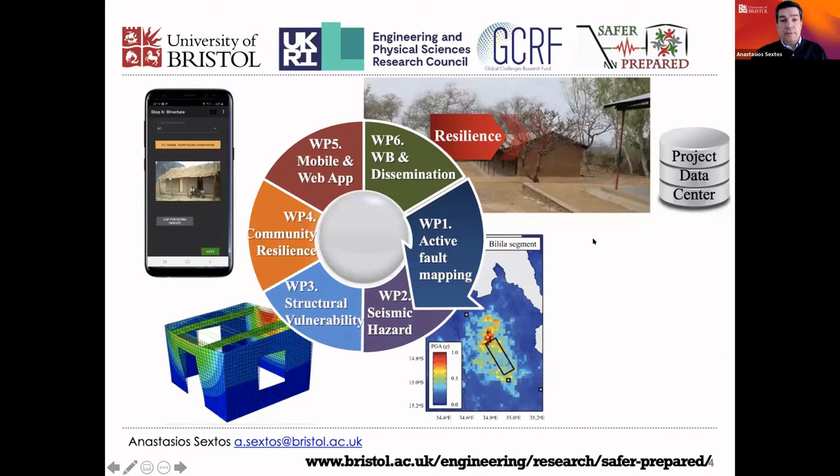This practically means that at the end of the day, we aim to digest all the information and research we are doing along with our Malawi partners and create tools that are rigorous inside and quite complicated, but very simple to use with an easy interface. We deploy them fast to collect the first data, contextualize for the country of Malawi, train people by webinars and also by physical presence, and co-design the strategy for national implementation.

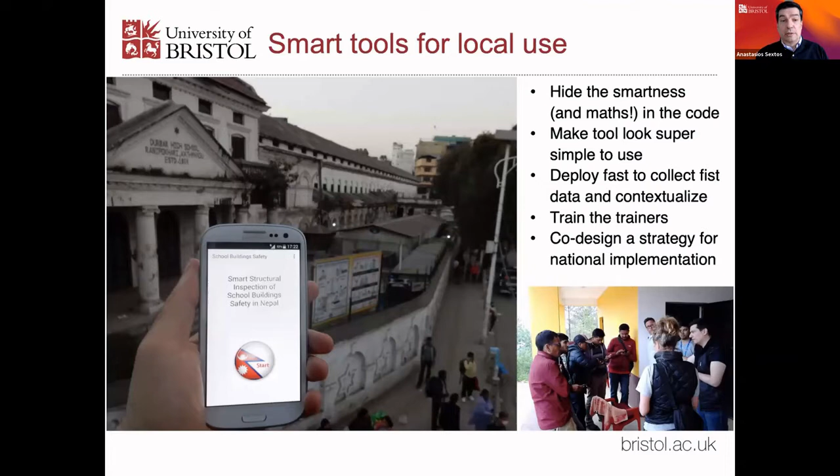Doing community engagement, unfortunately due to COVID, we weren't able to do that extensively yet in Malawi, but we hope that during the summer things will improve and we will share more information with you, and then actually transfer the ownership for everything we do to the people and the country of Malawi, so that you can use them with us and without us in the future.

You will hear more about that in the next presentations. In the meantime, feel free to visit our Safer Prepared website, where we will also be uploading the outcomes of this interesting webinar.

I'm from the School of Earth Sciences, and I'm going to talk about earthquakes in Malawi and East Africa in general. Many people are slightly surprised that we're working on earthquakes in Africa, because the perception is that the risk associated with earthquakes is low in Africa. And that's not entirely true.

Seismic risk is actually made of three components: the hazard, the exposure, and the vulnerability. In Africa, the hazard comes from the East African Rift, which is on a plate boundary that extends from Ethiopia in the north through to Mozambique in the south and runs through Malawi. The spreading rate is quite slow, so the earthquakes are infrequent, but you can clearly see a band of earthquakes running through the continent.

The exposure in Africa is very high. There's a high population density, and as you can see from this map in the center here, a lot of that's actually associated with the Rift Valley. Perhaps most importantly, vulnerability is extremely high, largely because the quality of the buildings means they're very vulnerable to seismic events. When combined, these factors lead to a high seismic risk.

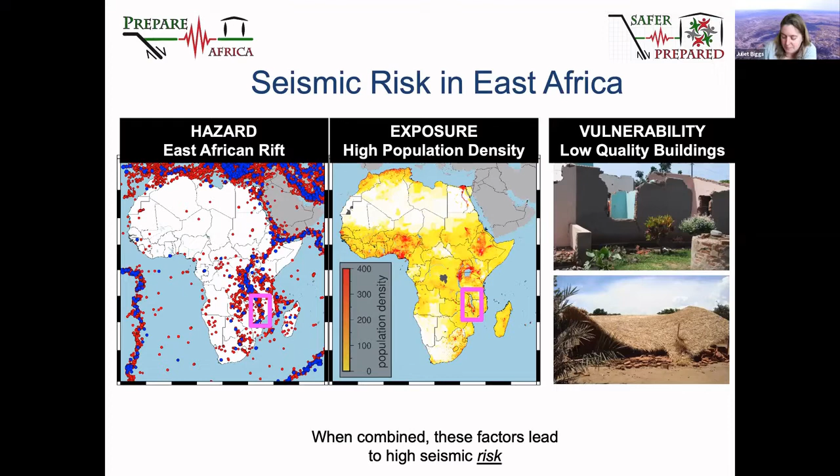I've mentioned that there are earthquakes all through the East African Rift, but if we zoom in on Malawi, you'll see that the red lines, which represent the faults, run all the way through the middle of Lake Malawi, and then through the densely populated area of southern Malawi, past the cities of Zomba and Blantyre. This is an active continental rift zone.

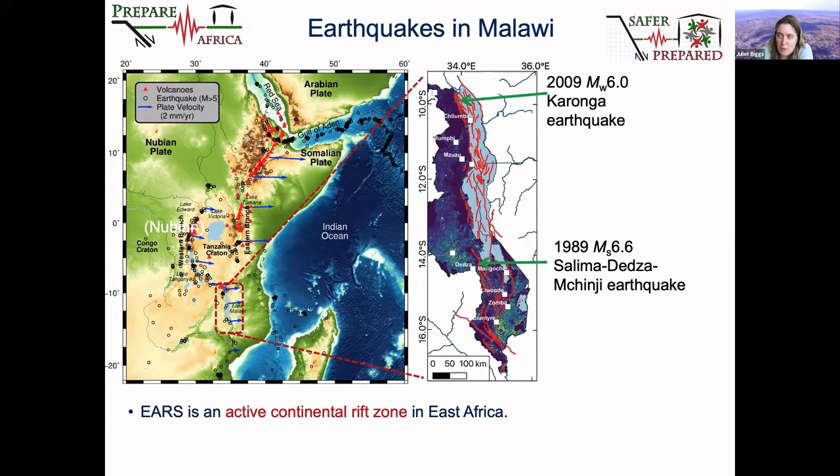In recent years, there have been two notable earthquakes. Firstly, the 1989 Salima Dedza earthquake, which was a magnitude 6.6 earthquake and was actually quite deep. And more recently, the 2009 Karonga earthquake, which was a magnitude 6 earthquake that happened in the north of the country. This earthquake was actually a fairly small magnitude.

There was a sequence of earthquakes, the largest of which was this magnitude 6, and it occurred in a very rural area of northern Malawi. But even so, it actually caused a lot of damage. It caused the collapse of over 1,500 buildings and major damage to several thousand more.

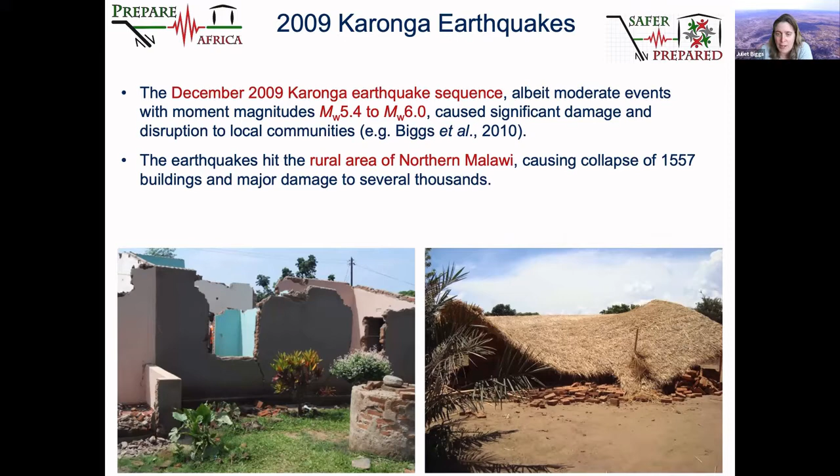But actually, this is one of the smaller earthquakes that might happen in Malawi. What we know is that these earthquakes occur fairly infrequently, but the instrumental record in Malawi is much shorter than many other countries around the world. Many countries have records extending back many thousands of years. In Malawi, the record of earthquakes really only extends back as far as 1950. So our knowledge of what happened in the past is very limited.

In order to overcome that, we have to look at the landscape and see where the earthquakes are recorded. Earthquakes occur on faults, and when an earthquake happens, the ground moves and it leaves what we call a scarp in the surface.

We've been working very closely with the Geological Survey, and in particular with Hassan Mdala, and there's a picture of him here, on the fault scarp that runs close to the city of Zomba. It's called the Zomba Fault. This scarp is about 30 meters high, and it extends for 50 kilometers.

We can estimate the size of the earthquake that would have caused this fault scarp. If we look at the global compilation, plotted on the right here, we can see that a fault length of about 50 kilometers corresponds to an earthquake of about magnitude 7.1. So in order to form this fault scarp, we know there must have been an earthquake of about magnitude 7 sometime in the last few thousand years, but we can't give a precise date.

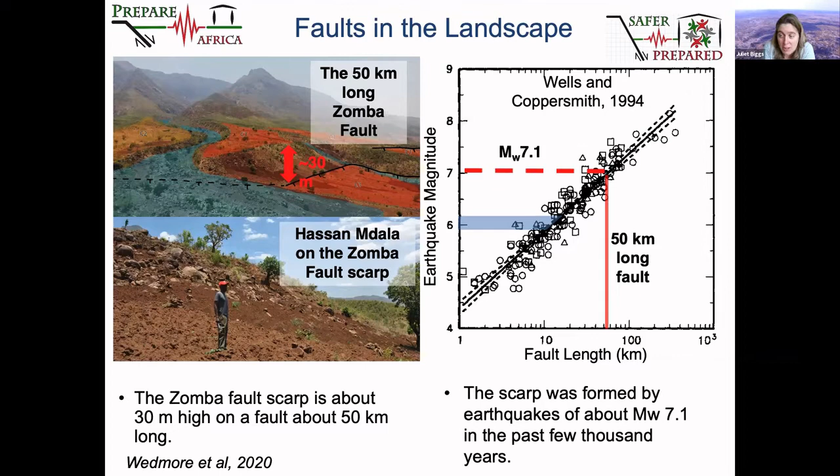What we found is the faults extend all throughout the country, and they have the potential for earthquakes ranging between magnitude 6.5 and right the way up to magnitude 8. That's significantly larger than any of the earthquakes recorded in the last century. However, these earthquakes are likely to be quite rare.

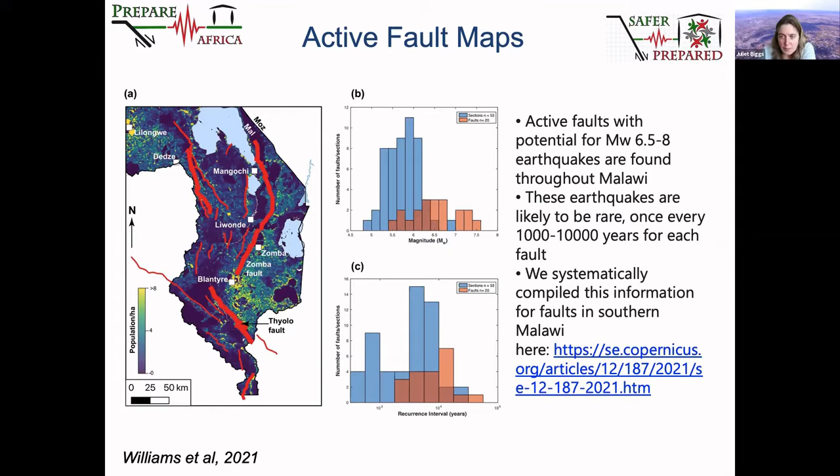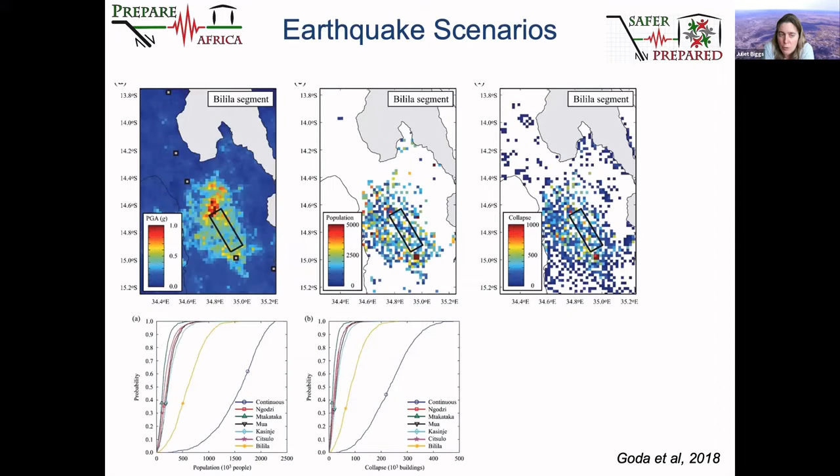This information allows us to imagine what might happen in individual earthquakes. Here's an example: an earthquake on the Bilila segment of a fault called the Bilila-Mtakataka fault. The earthquake would be about magnitude 6.7, so not a particularly large earthquake by Malawi standards. But even so, it's in a much more densely populated region than the Karonga earthquake.

We estimate an earthquake here would affect about 500,000 people and cause the collapse of about 70,000 buildings. And remember, this is still a fairly moderate size earthquake for Malawi. But this is just one scenario.

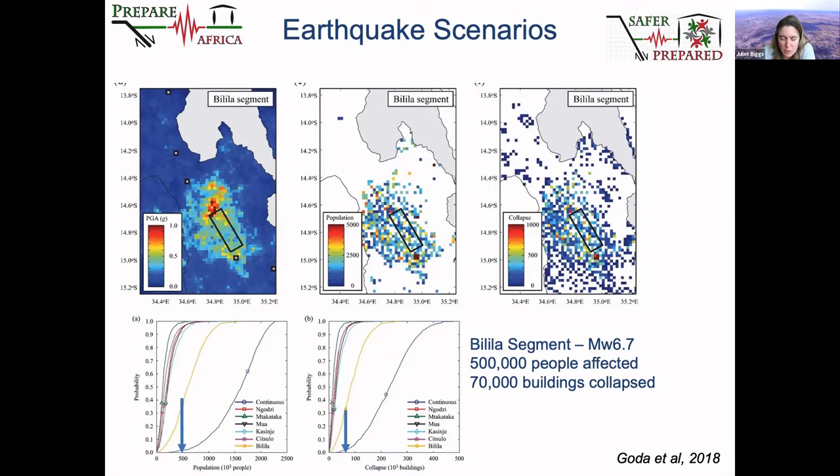As I said, there are faults running all through the country, so we need to think about what's going to happen overall. To do that, we come up with something called a probabilistic hazard map, which looks at the overall shaking level that you might expect in any part of the country.

I've shown two examples of these maps here. The one on the left comes from an international project called the Global Earthquake Model, and that shows the sort of shaking you might expect if you just looked at the instrumental record of earthquakes actually recorded in the short record in Malawi. The picture on the right is what we get when we include the information from those fault scarps. As you can see, the estimates of shaking are significantly higher.

These sorts of maps can be used for risk assessment and also for developing building codes. We're currently working on these so that we can include them in the new Safer Prepared app that's being developed, which focuses specifically on school building safety. You're going to hear more about that from the next presenter.

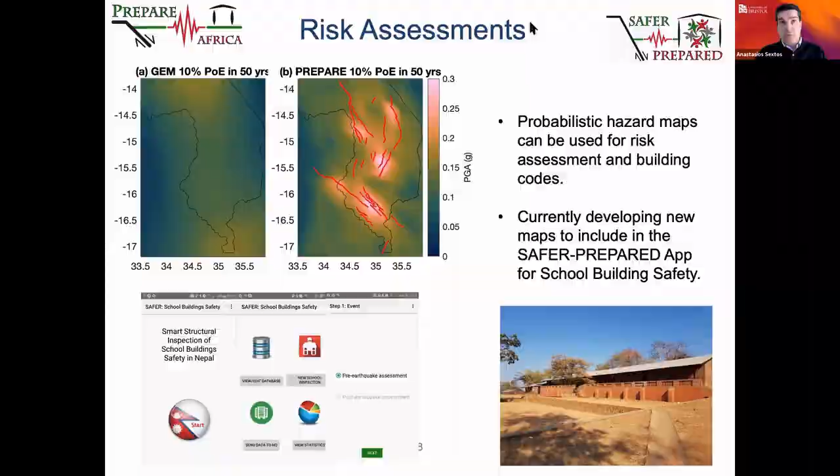It is equally important to discuss how we can assess probabilistically the performance of structures and school buildings during an earthquake. I would like to pass the floor to Professor McDonald and Dr. De Risi to talk to us about this very important topic.

Yes, perfect. Hello everyone. Today I am Dr. Raffaele De Risi, lecturer in civil engineering at University of Bristol. I am going to present the work that we have done together with Professor John McDonald and Dr. Nicola Giordano, who is the main postdoctoral research associate on the project.

Basically, we needed to create models that can be fed into the app. As Juliet was mentioning, risk is the product of exposure, vulnerability, and hazard. We focused on vulnerability. So what is the best model that we can develop for the vulnerability assessment? It is certainly a simple function that represents somehow a group of buildings, a group of structural elements.

Now, the journey to do so is quite long, it's not easy. First you have to be able to identify the structural typologies, and therefore you have to make yourself an idea of what is the portfolio of structures. Then you have to identify the material properties, and eventually do some analysis. Only at the end can you basically fit some functional models that can be fed into the app.

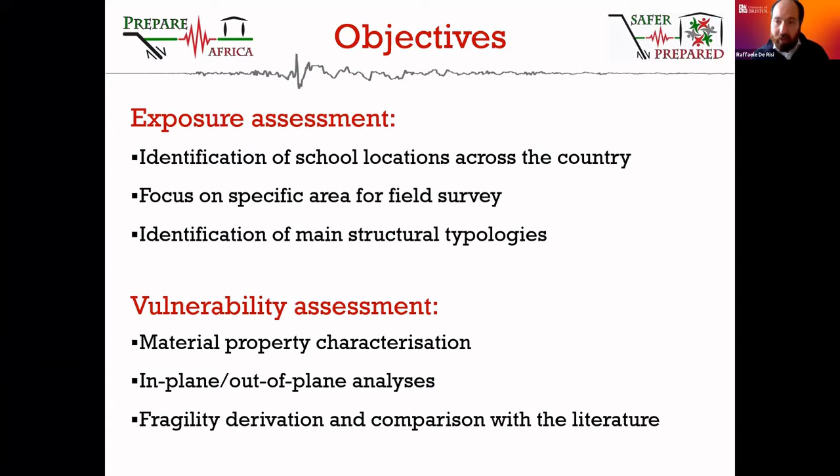So the journey started with very global, large-scale analysis, where we started from the census 2018, just to understand the level of scolarization. Then we have the precise map and location of primary schools and secondary schools.

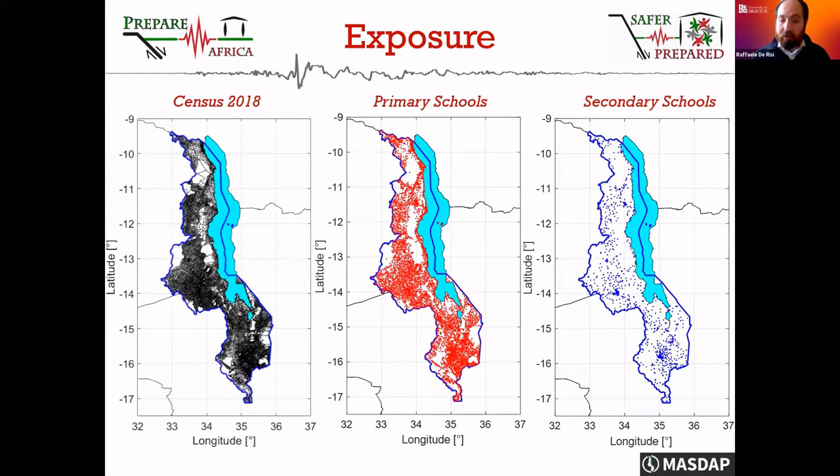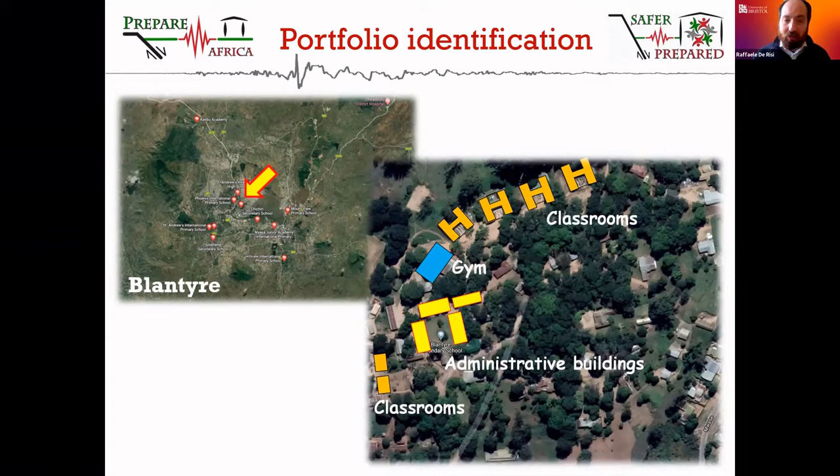After that, we started to do a small exercise, zooming in on Google Earth, because we were not able to go and have a proper survey. We started to discuss a little bit about what is the geometrical configuration of classrooms, administrative buildings, and so on. Eventually, you can come up with a sort of geometrical portfolio identification of the structures that belong to a specific typology.

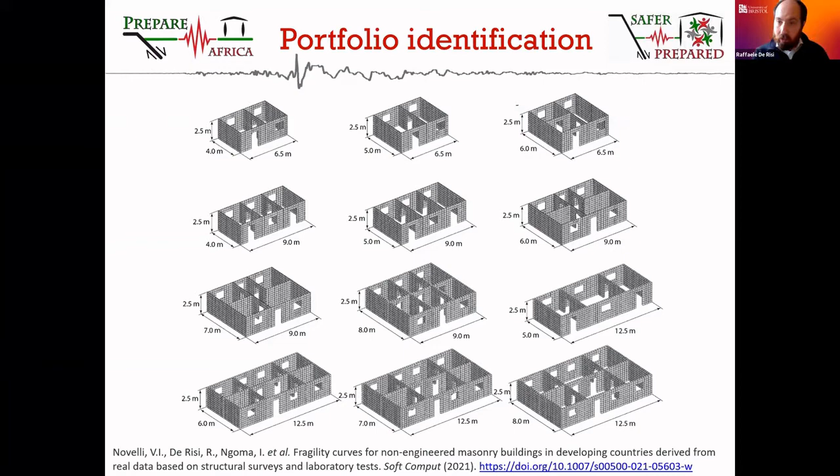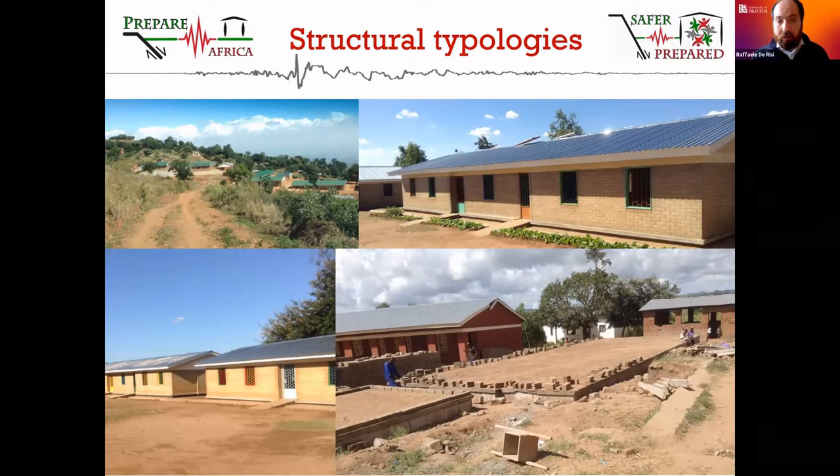But we also kept an eye on the new structural typologies that the government is building, and that NGOs are building across the country. And we came up with a structural identification that somehow is consistent with what we already knew about residential buildings, and in fact is consistent with the Kloukinas et al. paper available on the Journal of Housing and the Built Environment.

The classification of buildings is realized according to PAGER, which is a prompt assessment of the global earthquake for response. And then we also have the European classification, which is the European macroseismic scale.

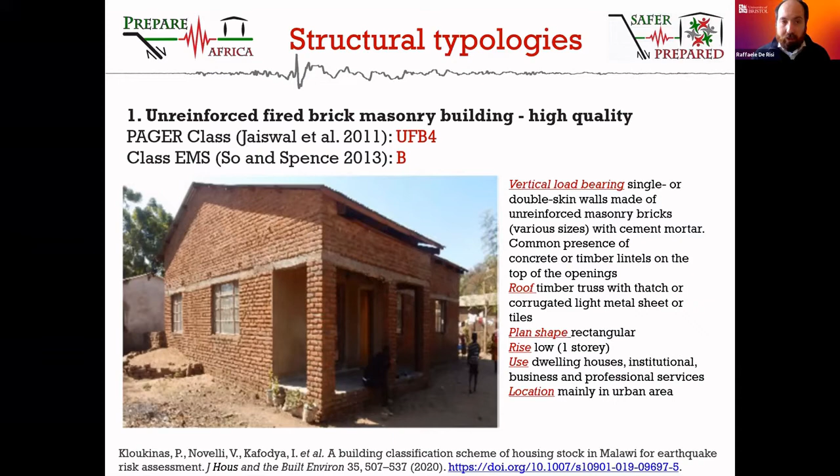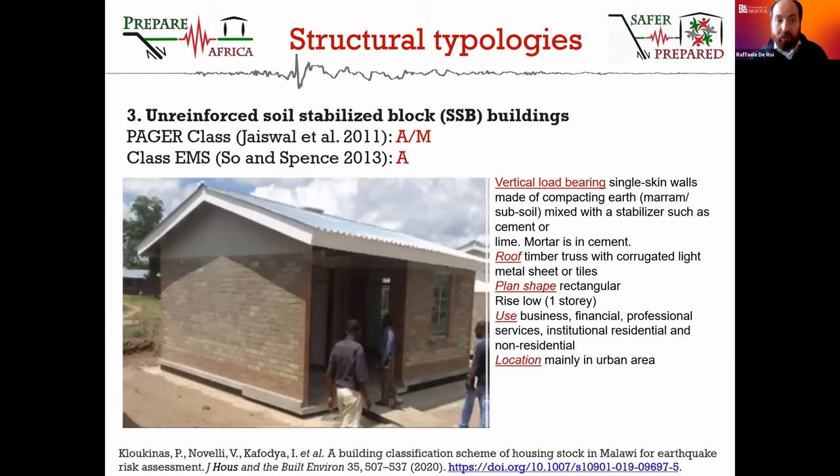As expected, one of the main categories certainly are unreinforced fired bricks masonry. Then we have confined masonry buildings, and the new category of buildings that are being realized are certainly stabilized blocks.

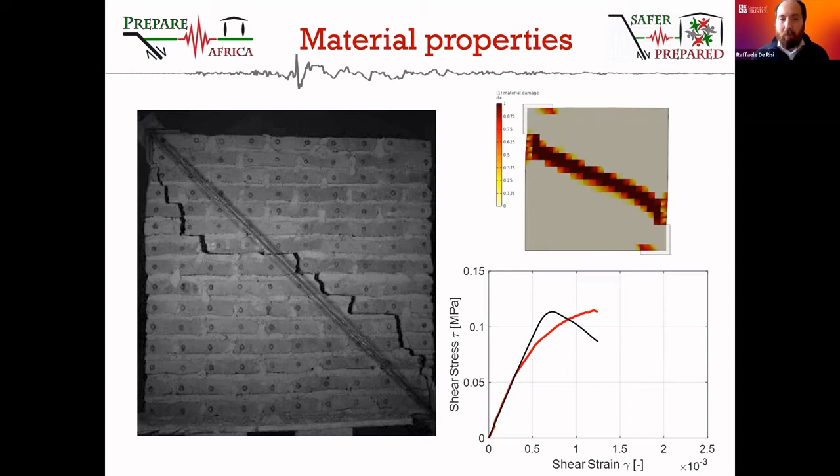Now, the geometry is not enough, the structural typology is not enough. We needed also some information about the material properties, and we did a very extensive experimental campaign in Malawi at the MAST Polytechnic laboratory. We got some experimental results that we were able to match with the numerical models, and therefore come up with some sort of quantification of the material properties.

So now we have a proper identification of the structures, of the geometries of the portfolio. We need to do some structural analysis. For this, we relied on the worst hypothesis ever, which is the lack of connection between orthogonal walls. This allows you to make the assumption that you can study independently the in-plane and out-of-plane facades, as we did. So this is the classical in-plane behavior, and this is the classical out-of-plane behavior.

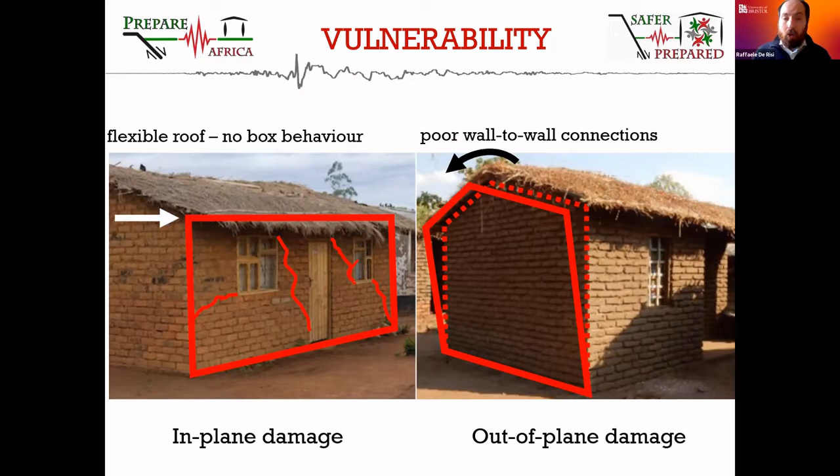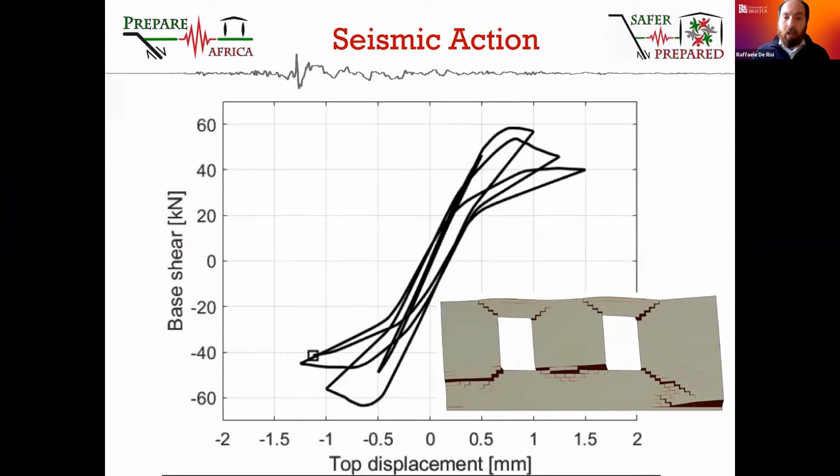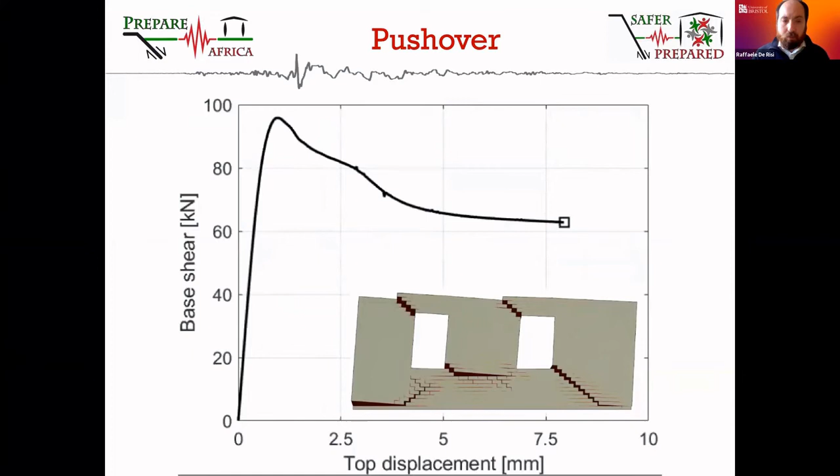Now, all of us are aware that earthquake loading is cyclic, and therefore when you apply an earthquake to a structure, it damages in a very asymmetric manner, with concentration of damage in some areas. For our analysis, we relied on a simple approach, the pushover analysis, which basically just pushes the structure in one direction. From these curves, it is possible to derive the final outcome, which is a fragility curve.

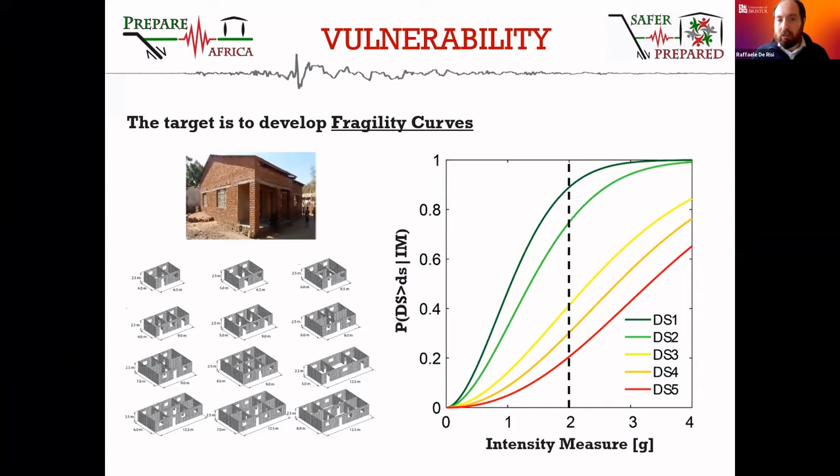What is a fragility curve? A fragility curve is a surrogate model, a functional form that condenses with a few parameters the behavior of a specific structural typology and of an ensemble of structural geometries. You can obtain these fragilities for different damage states, from no collapse up to complete collapse, shown in this plot from green to red. They represent, for a given intensity measure, the conditional probability of observing a given value, a given level of damage. So the red curve is complete damage, the green curve is no damage at all.

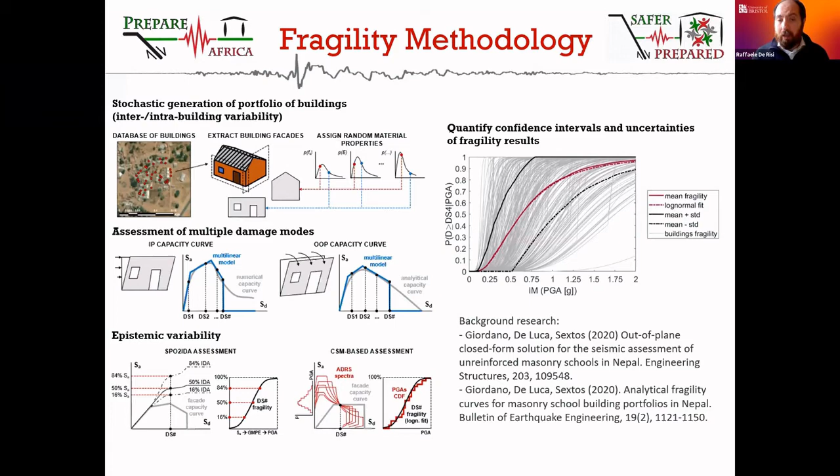We did this operation for each building. We separated the two walls, studied in-plane and out-of-plane separately, and then with conventional and consolidated methods such as SPO2-IDA and the capacity spectrum method, which are very established tools, we transformed all the pushover curves into fragility curves. The gray lines you see here represent a portfolio of structures, and the easiest thing to do to come up with a single fragility is to take the average and also account for the variability. This is the function that is eventually implemented in the app.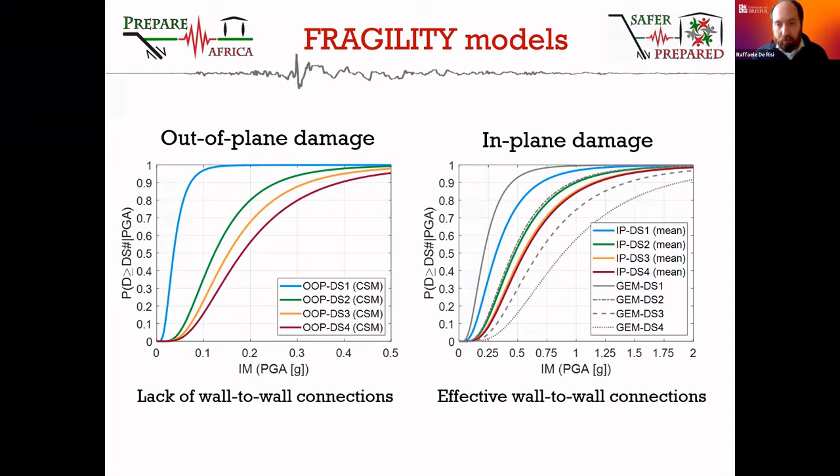This also underlined the necessity and importance of cross-connection between orthogonal walls. So in conclusion, now we think we have a good understanding of structural typologies and materials. And we combined the methodologies developed in Safer Schools in Nepal and the PREPARE project in Malawi to obtain new results that now can be implemented.

So thank you very much for your attention.

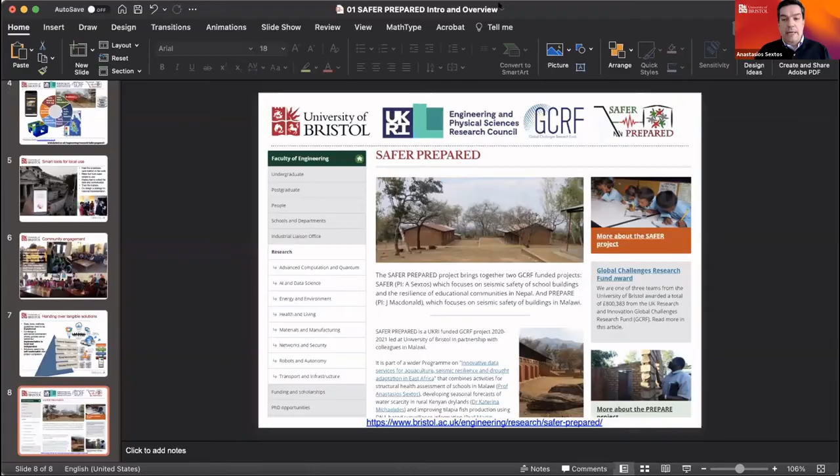We're going to show you a brief overview about how the mobile app and the web app are working. But above all, I would like to present you the concept of pre-earthquake seismic risk assessment and strengthening of school buildings. So just to check with you that you can see my slides. Is this confirmed? Yeah, okay, thanks very much.

I would like to stress here that pre-earthquake inspection of buildings takes place all over the world. In developed countries, believe it or not, there is about 50 to 60% of buildings whose seismic performance is inferior compared to buildings that have been designed to modern codes.

Also, there is no country in the world that can actually strengthen all the buildings that require strengthening before a future earthquake. This means that in all countries, from the most developed ones, the States, let's say, or Japan, or other countries in Europe, to the developing ones, there is a great need to allocate resources and funds in the most smart way that can create the maximum impact.

Which means it will address the maximum risk where it exists. Juliet presented already the concept that dealing with risk is not about dealing with the weakest structures that Raffaele presented. It's about dealing with the convolution, which are the weakest buildings that are exposed to the highest level of seismic hazard. At the same time, they involve the highest number of people, of students, of assets at stake.

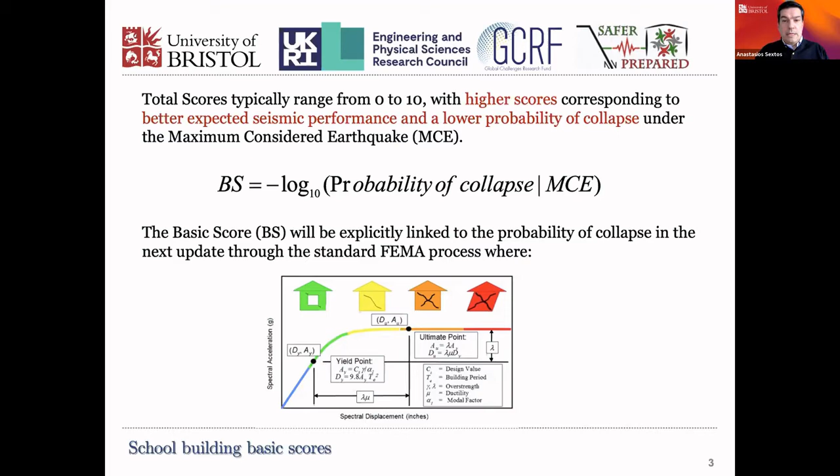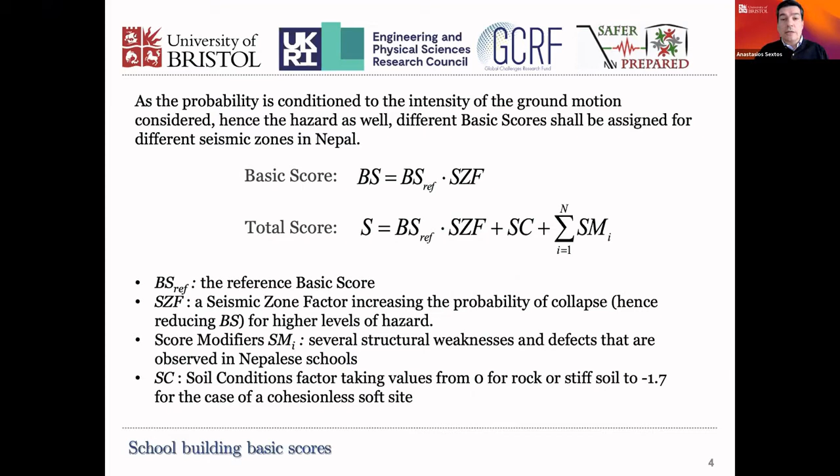Now, the problem is that most of these techniques and procedures that involve structural vulnerability, seismic hazard, soil conditions, and all these factors are tailored to each different country that they are aiming to be implemented in. This means that in Malawi, we cannot actually take methodologies that are developed in the States and apply them. Not even the ones that we developed for Nepal, which were also tailored. We need to develop procedures that are very relevant and contextualized to Malawi per se.

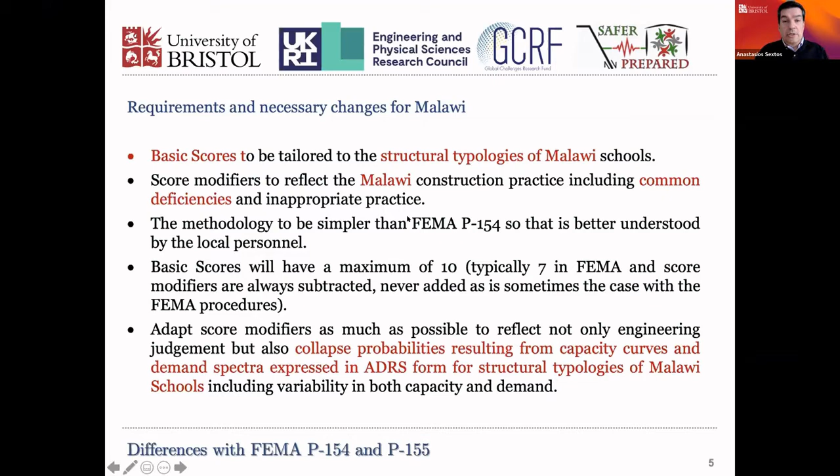This means that we need to identify what are the structural typologies that are most common for school buildings in Malawi. We need to identify scores and probabilities for them, see common deficiencies that exist for the structural portfolio and the building stock in the region, probably also in different cities between urban and rural regions. We need to adapt the methodologies and then repeat all the calculations that we are doing in other countries, specifically for Malawi. So this is the quest we are currently working on.

And in fact, in a more general sense, if you zoom out a little bit among different countries, you will see that we've got a database of 42 to 45 different typologies, structural types of buildings, different features and different materials, different structural configurations, and different performance at the end of the day.

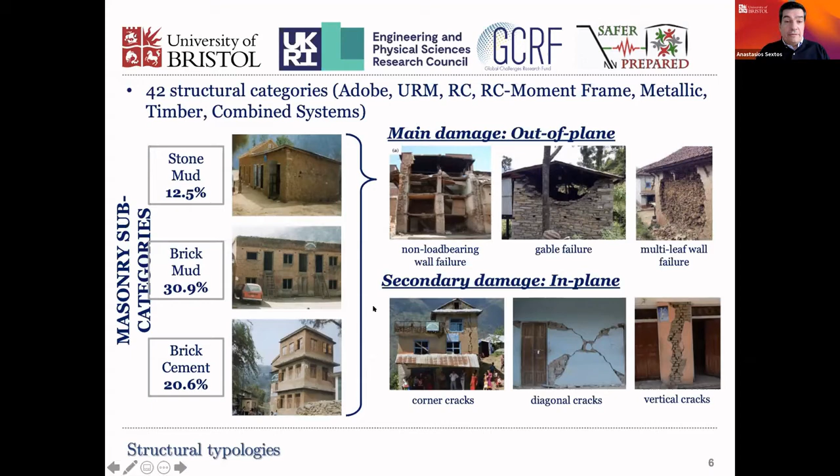But for Malawi in particular, and for school buildings, we have identified 5, let's say, of the most commonly used typologies. This doesn't mean that in the database and in the software, we don't cover for the rest. The software is wider and covers all possible structural typologies we can find. So we can also cover a steel building or a precast building, or a building according to the latest seismic codes, if it exists.

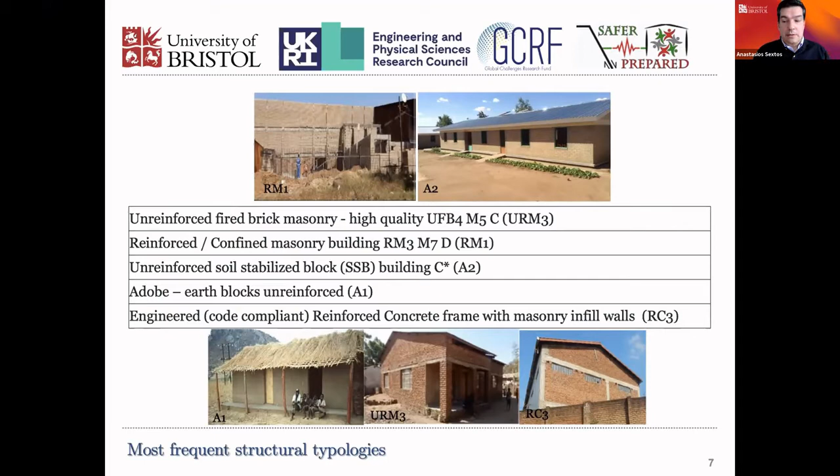In most cases we're just talking about one-story buildings, as you know better than ourselves in Malawi, but the database also covers the case and distinct relative risk for buildings that are two stories or even higher if they exist in the capital.

Raffaele presented how, following standard methodologies, we have been deriving fragility curves based on analytical capacity curves. Capacity curves relate the lateral seismic force with the displacement, because displacement is a proxy of damage—the higher the displacement, the higher the expected damage.

All this is a series of thousands of scenarios that we're running for different buildings with different intensities of earthquakes, with different probabilities and uncertainties on the material side, the capacity side, and the demand side, which is the intensity of the earthquake in a specific region. So the same building can be equally weak, but when located in a region with higher seismic hazard, the total risk will be higher.

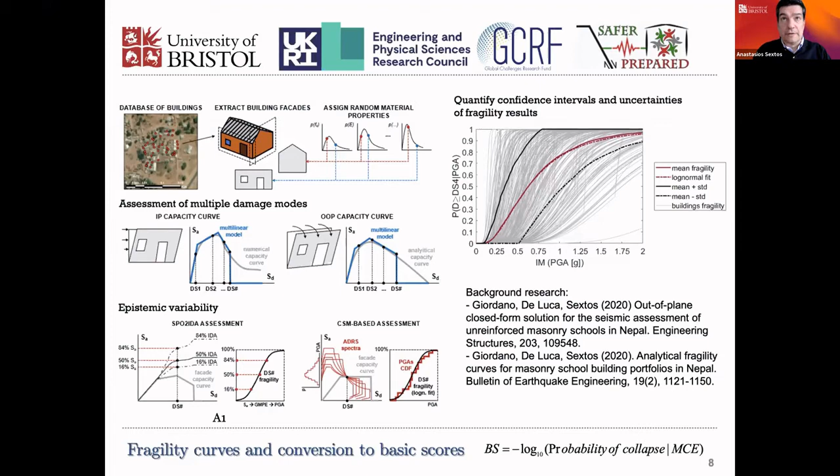And if that's the case, the methodology we're developing will prioritize this building. This would make good use of our limited funds to strengthen this particular building. So this is the concept in short.

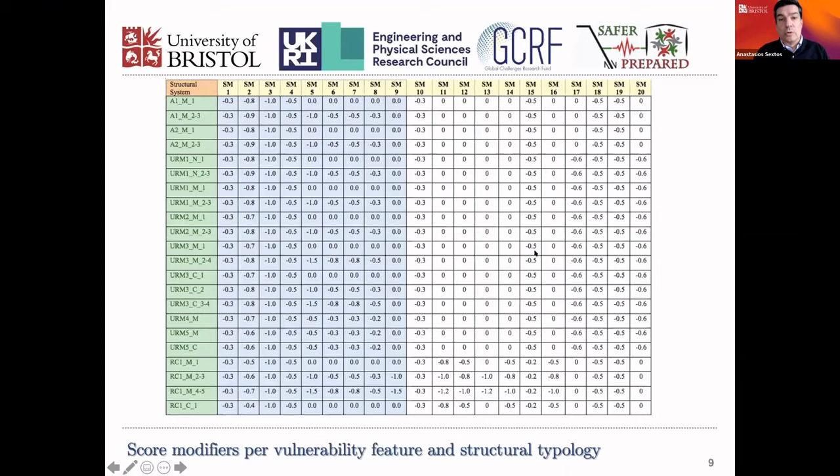Of course, there is some scoring that seems simple in the table, in the database, and in the software, but behind each number you see here is a probability of collapse. There is a model, there is hazard, active fault mapping, improvement of PSHA models, and so on. So our effort is to make complicated things look very simple and be able to implement them in a local context.

So apart from the structural typologies and the local hazard in the area we're talking about, it is also very important to adapt the scoring. We give a score to every single building, depending on some deficiencies or vulnerability features that we observe.

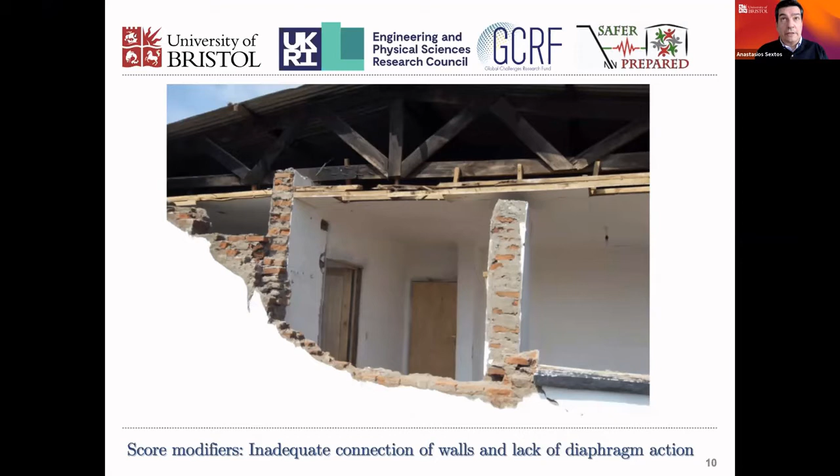In this case, that's clearly an inadequate connection of walls, probably lacking corner elements that connect to perpendicular walls, lacking diaphragm action, which means it's very easy for the walls to fall out of plane. That is very dangerous. And then the roof, even though it's light in most schools in Malawi, is going to just fall down and jeopardize the stability of the building, and also might lead to fatalities in school buildings.

We can also observe cases where structures don't have a very normal, regular shape. This is always an aspect that has to be accounted for in seismic codes. When structures have been designed with such features, there is no problem. When this was not taken into consideration, we take it as a source of vulnerability in the system.

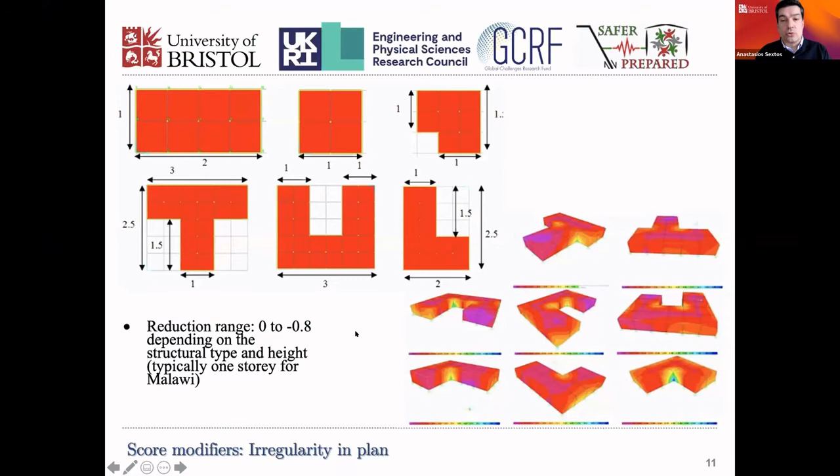For reinforced concrete buildings, which we know are not very relevant for schools in Malawi, so I'm going to skip them—but just to give you an idea, wherever there are weak points like short columns that don't extend to the full height, during an earthquake they will fail in shear abruptly and in a fragile manner, even though they bear vertical loading perfectly well. So this is always a very bad surprise.

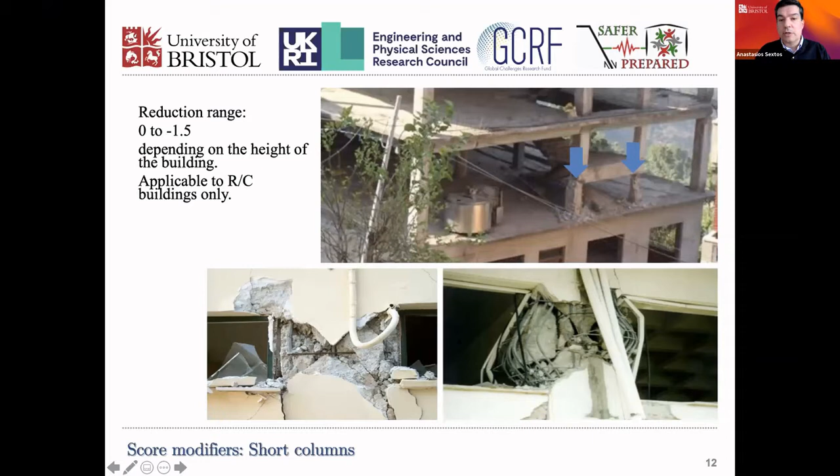After an earthquake, that can happen all over the world, so we subtract points for that as well. When there is corrosion, or low quality materials, low quality concrete in this case, or cracks in the walls that we can observe, for instance in masonry buildings, or even in infills of reinforced concrete buildings, then if we see that, we subtract points.

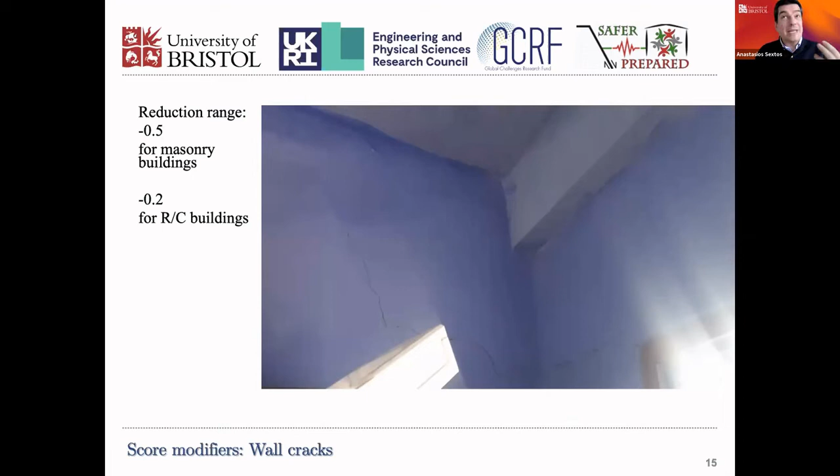So the purpose of the app is to ask engineers to see things on site, click the button—I've seen this—and then the software will subtract points that are calibrated to meet the mathematically rigorous probability of failure caused by this particular feature.

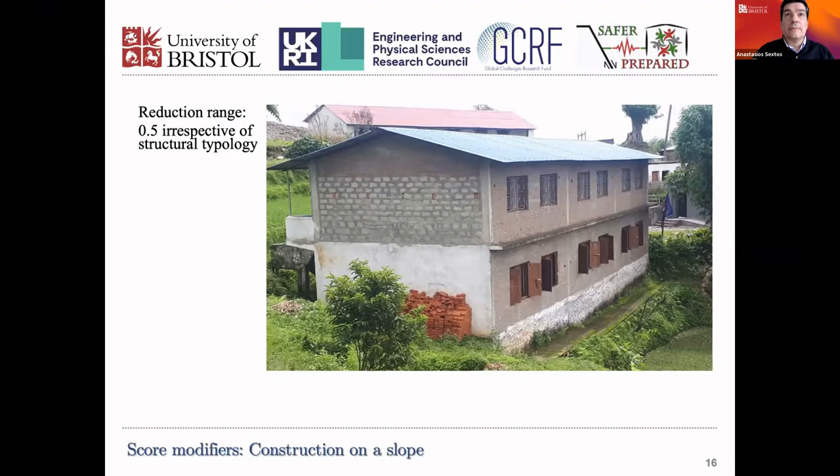In this case, that's a non-structural feature: when we're building on slopes. This is always more dangerous because the foundations can be uneven, or because we can have site amplification—earthquake ground motion becomes stronger in strange topographies because waves are reflected within the soil medium.

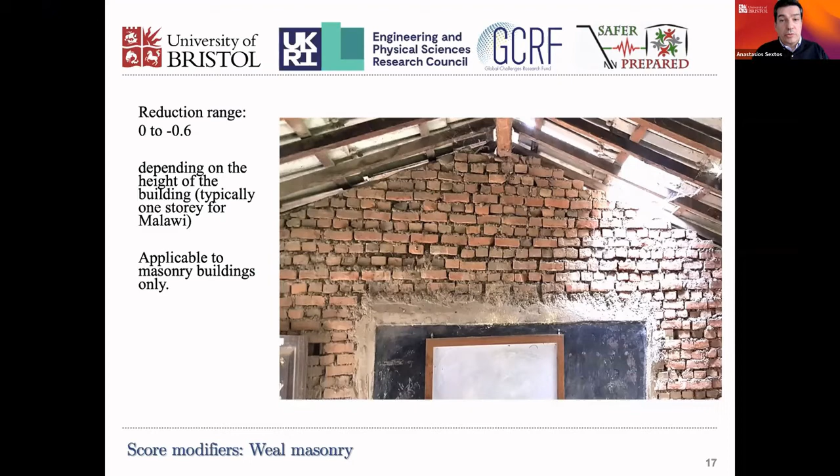And clearly, when we see disorganized masonry or low quality mortar, either mud mortar or even lime mortar, when we see visually things that are not convincing, that can't bear the lateral load of an earthquake, then we just report it in the app, and the app will do the business and provide the appropriate score.

Assume we do that in theory for all school buildings in Malawi, then this will give us a relative score. The absolute score doesn't mean that much, because what if score is 3 or 3.1 or 4 or 4.1? But the relative score, which are the 10% of buildings that are both exposed to high seismic hazard and weak enough to trigger attention, this will be highlighted as priority A, which doesn't mean they have to be strengthened immediately. It just says, out of 100 buildings, these are the 10 we need to see again.

Why? Because before we make a decision, we always want to do some rigorous engineering calculation and apply strengthening techniques after thorough investigation. But it's a very good screening. We filter out the 10% most exposed to seismic risk school buildings.

And this is exactly the same procedure followed worldwide. It's just that all the numbers, typologies, and materials are contextualized for Malawi, and the hazard, as Juliet presented previously, is also contextualized for Malawi.

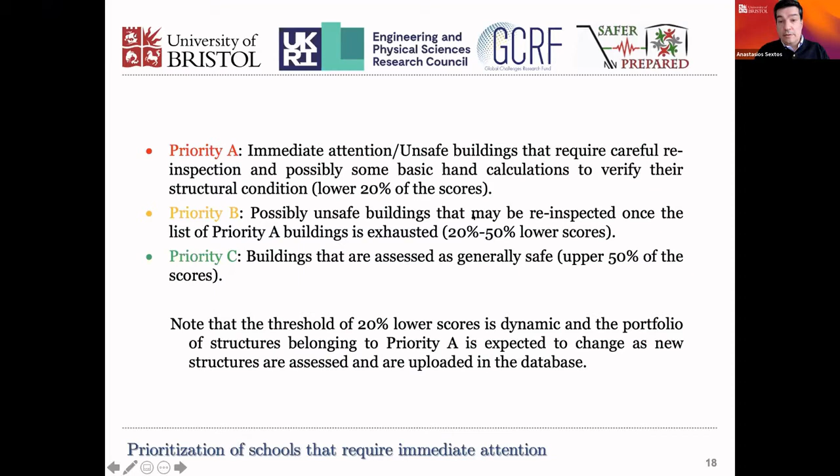And then this would lead to how this looks in the app and web app. You can see here how we implemented that. This app involves both aspects - it's actually two software into one app that cover both Nepal and Malawi. You have to pick the flag for Malawi to follow the particular typologies and scoring that relates to Malawi.

But you can download it for free in Google Play. Actually you can do it as I speak. It's in beta form, because we'd like to first have a field campaign with our colleagues in Malawi and make sure we can test it, improve it, update the scoring, update typologies, add local vulnerability problems that maybe we haven't thought about, which are very localized in some regions. So the more we apply it, the better it becomes. But clearly you can download it as we speak and start working with it.

The only thing you won't be able to do, because it's free A to Z, is - you can play with it and rank or score your school or the house you live in, but unless you ask us for a code, you won't be able to sync to the server. For an exercise, though, you can certainly use it.

So how does it work? All the mobile phones act like a client. You don't need web access. You don't even need 3G or 2G in the field, because you just use your normal phone, take photos, and report what you see. Location is tracked automatically. Once you get to Wi-Fi in your office or home or wherever you can find internet, you can sync with the database. So no need for internet access - it works perfectly well offline.

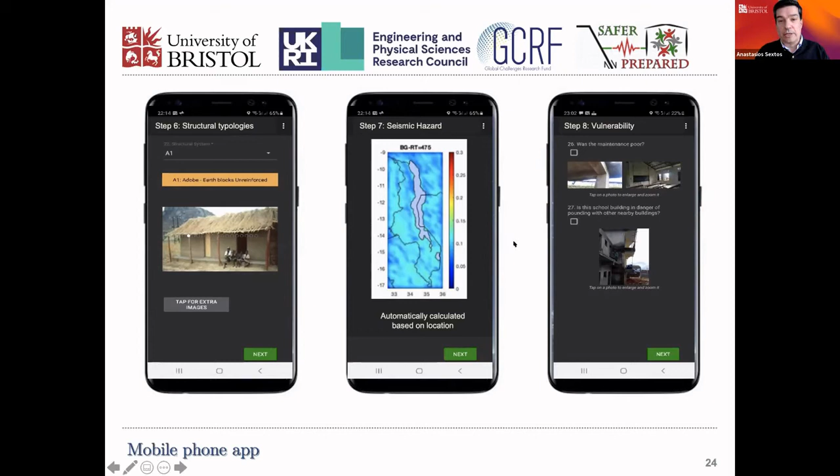Once you do that and sync, all this information goes into the web app, behind a firewall, into the server. This lets authorities access it, for example this shows 1,200 school buildings already monitored and recorded in Nepal.

This gives you the exact location and score of every school assessed in the country. It's a very useful tool because it doesn't require installing any software. You just use a shared username and password, and then the authorities, the Ministry of Education or the provincial inspector responsible for the school portfolio, can see in a relative sense which buildings are red, priority one, which are second priority, and which seem very safe. This is precious information you can get in zero time.

Imagine that about 10 or 15 years ago, when an earthquake happened even in the most developed countries, it was taking six months for this map to be compiled. Same for inspections before an earthquake. It was all taking too long.

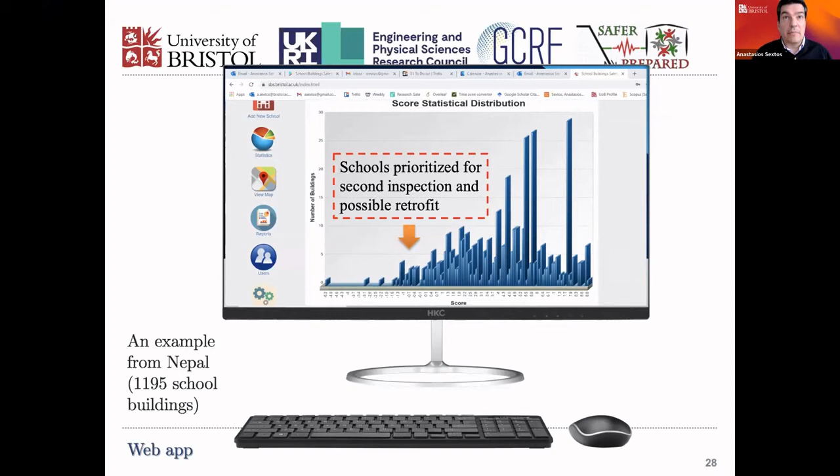It can also show you, as I described previously, a ranking of all building scores on the same scale. Clearly, the ones with the lowest relative scores are the school buildings with the highest risk. So if we have funds to strengthen 3, 10, or 20 buildings, we'd better invest them wisely to have the maximum impact and mitigate where it's mostly needed.

Then you can also have access to all the photos, and we can amend the reported information. If you don't feel confident, there's a question at the end asking if you're confident about the data you filled in. If not, we can log into the system together, discuss the data, improve and correct it, and make sure whatever we provide is accurate.

As a final set of slides, Professor Agarwal will talk about a similar type of assessment, but this time focusing not on school buildings but on the resilience of the community. We might have very strong buildings, but if the community requires strengthening in terms of planning to support the life around the buildings, then strengthening buildings alone is not enough—it's clearly more about the people. He will talk about how you can also assess the community through a self-assessment scheme.

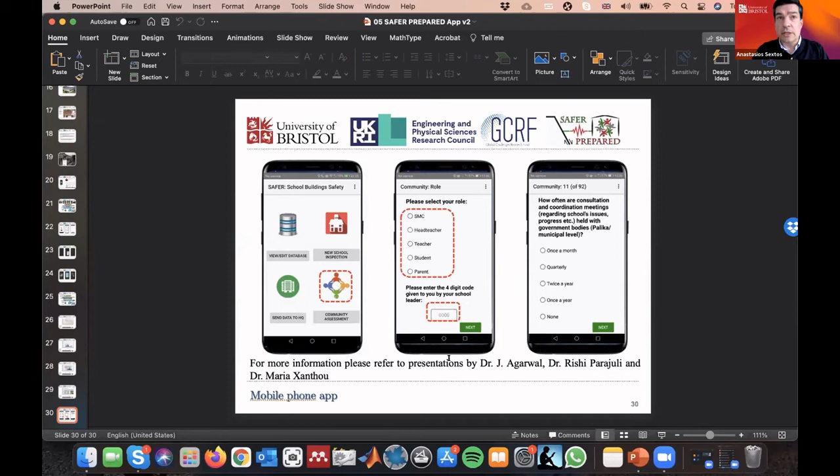These are just some snapshots of how the app looks. I think I've exhausted my time. There's probably one minute for a question, but I'd prefer to give that minute to the next speaker since I don't want to abuse my role—I can answer questions at the end of the session if there's time. So with your permission, I'd like to yield the floor to Jitendra Agarwal to talk about community resilience metrics. Thank you for your attention.

So why do we want to talk about resilience? As you heard about the safety of buildings, traditionally we design buildings to be safe. However, natural hazards are increasing in frequency and severity, and resources are limited. We cannot make buildings foolproof, meaning we have to try to maintain the functionality of our schools with minimum disruption. And that leads to the notion of resilient schools.

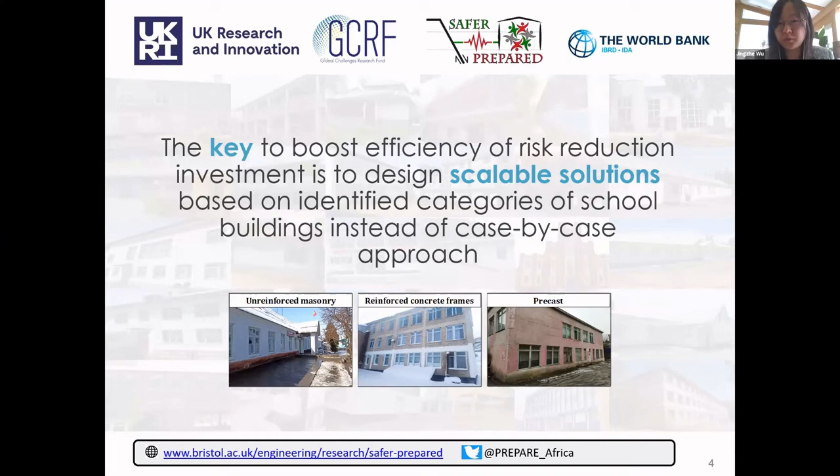So our experience told us that strategic planning is the essential base to realize such solutions at scale. Under our program, we've developed the Global Library of School Infrastructure. We call it GLOSI here, which is a live repository of all the school building types we identified around the world, following a systematic classification system, namely the taxonomy here.

And for each school building type we identified, we have quantitative fragility and vulnerability curves derived, and also corresponding cost-efficient vulnerability reduction solutions. Powered by this library, we also have the roadmap for safer and resilient schools that provides step-by-step guidance for government decision makers, from diagnosis to analysis to planning, to actually designing and implementing efficient and risk-informed intervention strategy and investment plans at scale.

So looking at the steps we needed to reach solutions at scale, we want to highlight that the very initial necessary step is to have a good school infrastructure baseline. A good school infrastructure baseline will help us understand what is exposed to the hazards, where they are located, when they were constructed, why they're vulnerable, and how we can reduce their vulnerability efficiently.

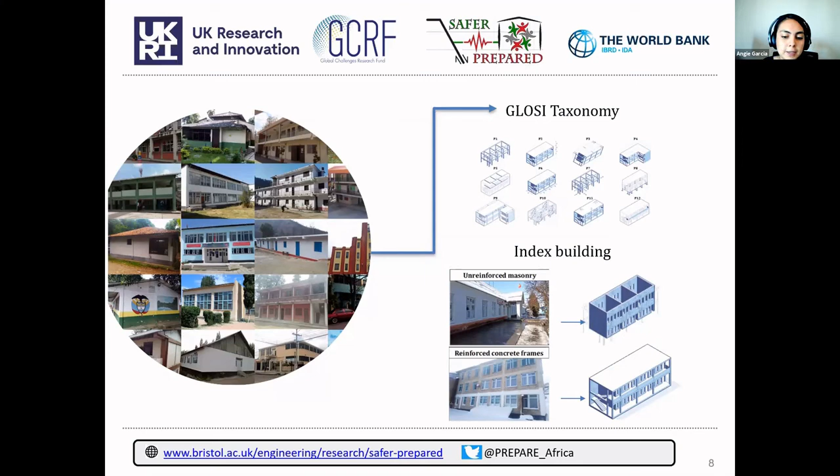The GLOSI taxonomy classification enables technical teams to assess representative buildings and identify vulnerability reduction solutions that would apply not only to one building, but to a set of buildings. It is critical to ensure that school buildings are strong, but also flexible enough to sustain different loads from natural hazard events. For this reason, the GLOSI framework aims to provide guidance to assess and identify the most cost-efficient intervention solutions to make schools safer at a scale.

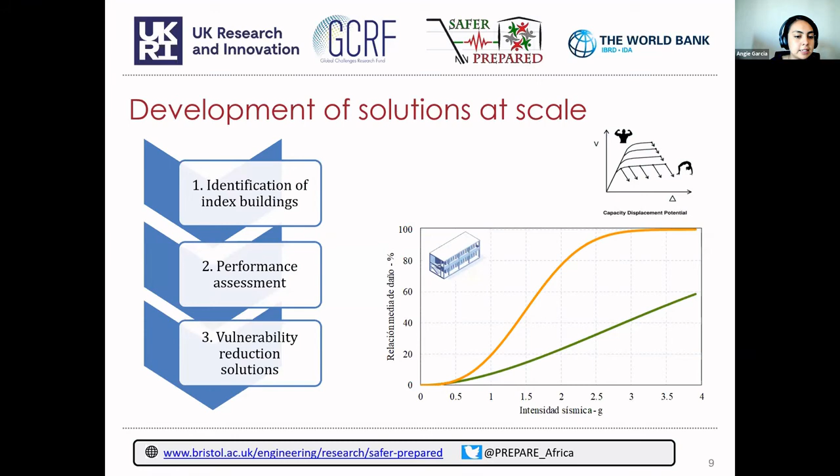The challenge of scale: once we understand what structural and functional interventions are needed for school infrastructure, there are two main questions we need to answer. First, what is the objective of the intervention? And second, where should interventions start?

To address the first question, it is important to recognize that if we aim for the highest performance targets, the most likely situation is that interventions will not be cost efficient. For this reason, there are different scenarios with different intervention levels that can be assessed to benefit as many students as possible. Depending on the resources available and the condition of the school portfolio, a short-term performance target for interventions, for example life safety, can be targeted, and then in the medium and long term, allocate additional funds to reach higher target levels progressively.

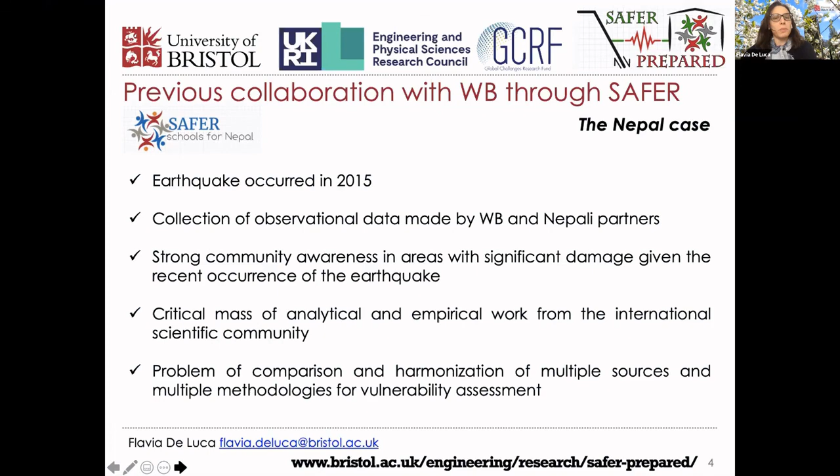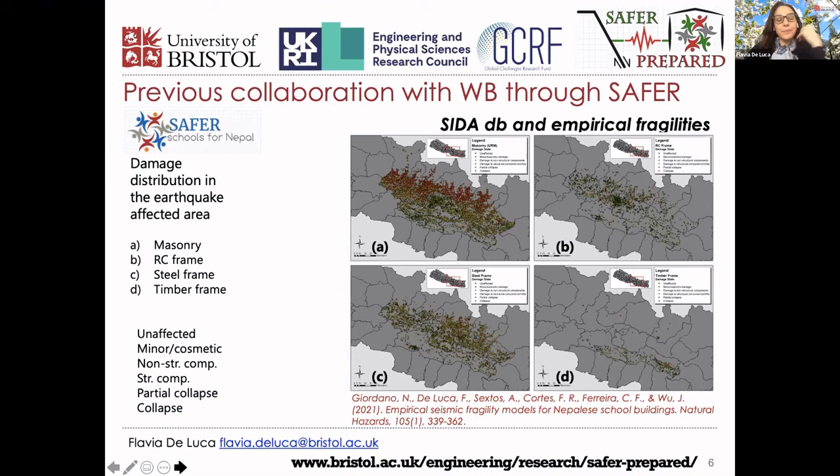In that case, the challenge was harmonizing and comparing multiple sources and methodologies for vulnerability assessment. For example, we used tools available from the World Bank, like the SIDA database, analyzing their damage data collected after the earthquake, and comparing it with the data in the SAFER app adapted for the Nepal case. Even though damage data were abundant due to the recent earthquake, we faced the challenge that observational data were not enough to carry out, for example, empirical vulnerability tools.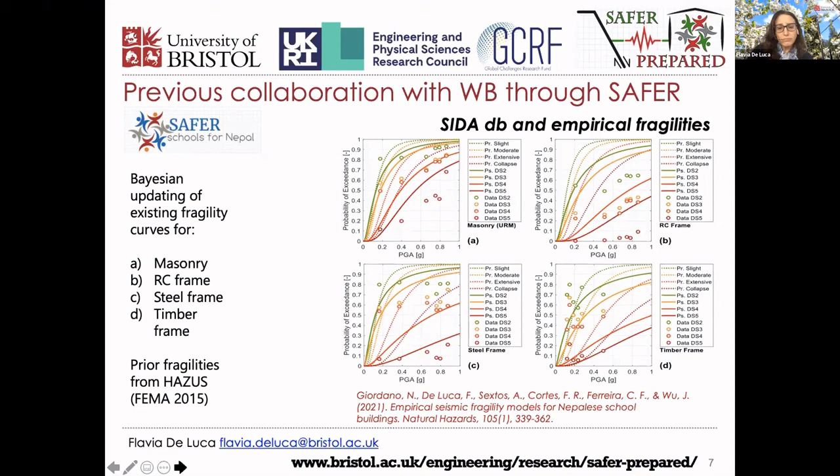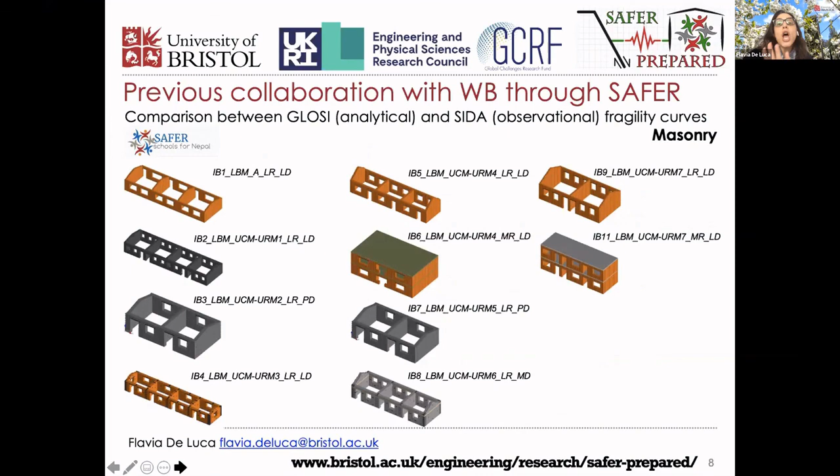In that case, we used Bayesian updating to merge regional tools with non-regional tools. For Nepal, we also compared analytical and observational fragility curves, looking at the GLOSI taxonomy presented before, comparing the different tools, analytical and observational.

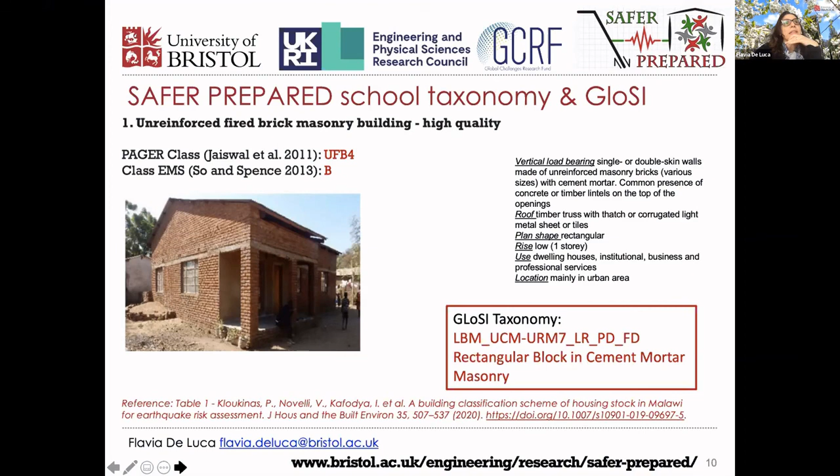What about the case for Malawi, and what are the current activities and what we hope to achieve with the data collected through the app? In the previous presentation by Raffaele, John, and Nicola, there were three main school typologies. The preliminary exercise we've been doing is benchmarking and establishing correspondence between the categories of schools embedded in the Safer Prepared app and the GLOSI taxonomy. We're doing this because it will allow us to develop and target our fragilities for these typologies with respect to the GLOSI taxonomy.

In a sense, what is this going to achieve from a dissemination point of view? The GLOSI database also has in-country sections, and our collaboration with the World Bank could provide a specific in-country section for Malawi, where all the work done in the Prepare project on vulnerability, and currently done for Safer Prepared on analytical fragility curves embedded in the app, can be harmonized. This can work as a baseline for an in-country Malawi chapter in GLOSI, achieving our main target of harmonizing the different resources. I would like to thank everyone.